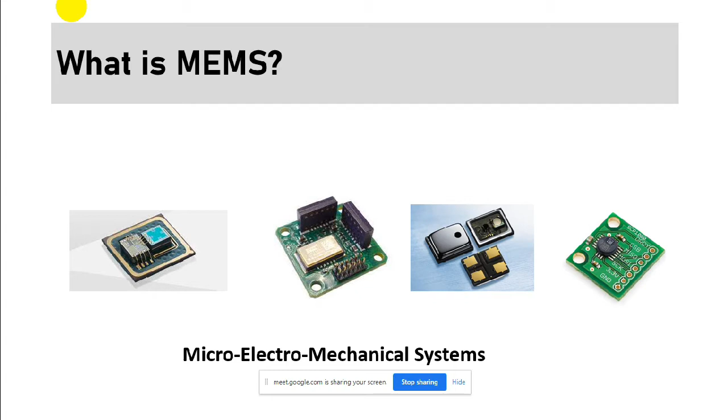Then what is MEMS packaging? We can't use that MEMS device directly because it is exposed to mechanical damages and environmental conditions such as high temperature, so it can't survive. In order to protect that MEMS device, we have to protect it in form of some casing. This casing is known as package, and the packaging of this is also referred as MEMS packaging.

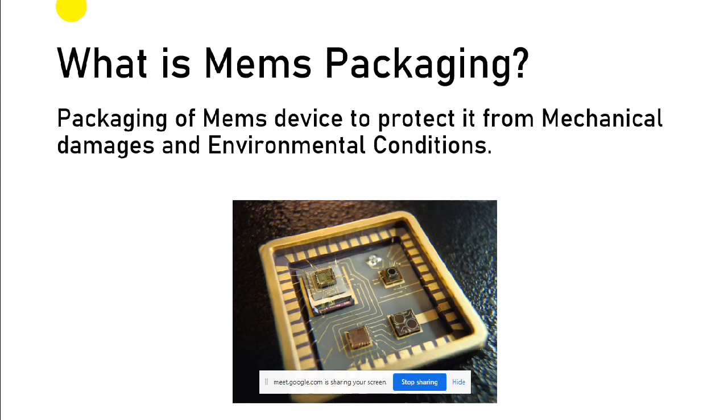So this is the packaging process. First we have very big wafers, and we inspect whether the wafer is working fine or not. Then we saw it, then we separate a dice from it, and this is the dice on which our MEMS device will be based. Then we post process it and do all the necessary connections.

Then a package has two parts. First is substrate and second is a metal cap. So this is cap and this is substrate. The substrate works as the external circuitry — this is our MEMS device, so it should be connected in such order that we can access it from these IO pins.

So there are two methods: first is wire bonding and second is flip chip. In wire bonding, we use fine metal wires, and these wires are connected through these IO pins. This is a very space-taking process. So instead of using wire bonding in places where we require miniaturization and want to consume less space, we use flip chip. I have explained flip chip in further slides, so let's move to the next step.

Then what we have to do, we'll seal this MEMS because it is exposed from the top, so we'll put a lid on it and do the necessary sealing or welding as required. And then we'll do calibration and a final test to check whether all the connections are proper and whether our MEMS device accesses properly or not. There are several types of these package materials.

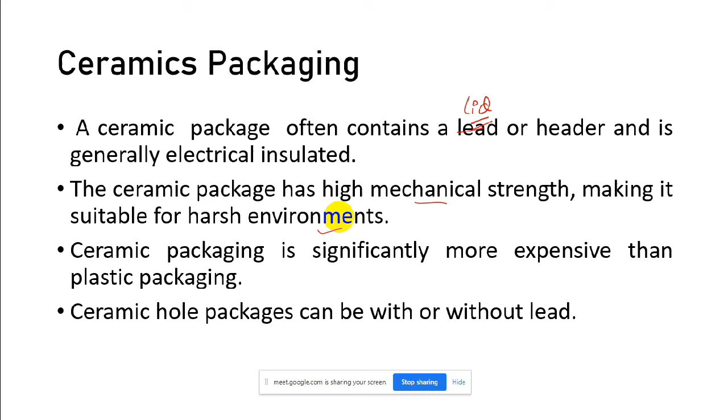We use ceramic packaging because of its high mechanical strength, making it suitable for harsh environments — it can handle stress and similar conditions. Since it's a reliable packaging, it is more expensive than plastic packaging, but it is less expensive than metal packaging.

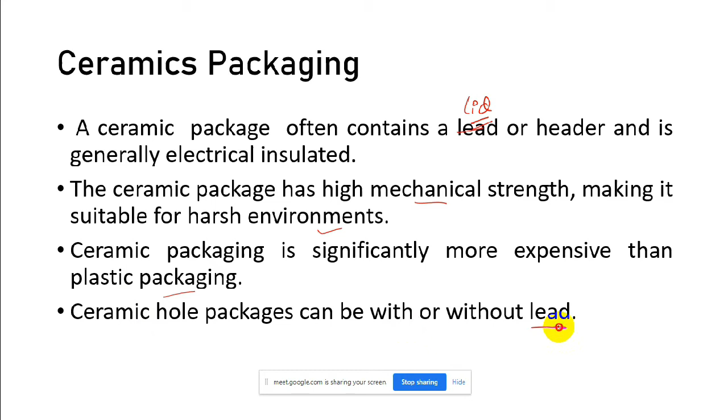These ceramic packages can be with or without lead. I'll show you what lead and lid are. Suppose this is our demonstration of ceramic packaging — this is our ceramic substrate.

We put a MEMS device here, and then we have to connect it from IO pins. You can use these leads for IO, or you can use these metal fillings to connect through our MEMS device. What we do here is a process called wire bonding, which I told you about. This method is known as wire bonding.

After connecting it, we place a lid on it so that it could be protected from environmental conditions and mechanical damages. So this is the final output of how this looks, and this is how it looks.

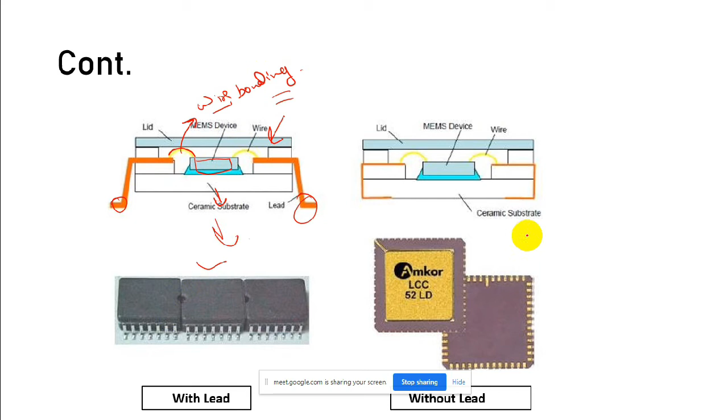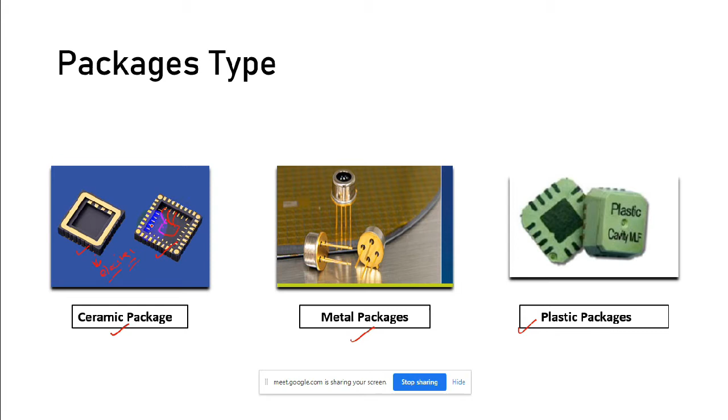Let me clear one thing. I told you that when we are not using leads, we can use these types. So here our MEMS device will be based, and with the help of wire bonding, we can connect like this, and then we can access that MEMS device later.

Next is our metal packages. Metal packages are attractive because wherever we want hermetic or airtight sealing, suppose this is our microphone sensor or gyroscope sensor, these sensors require vacuum conditions. So first we'll create a vacuum condition. Suppose this is our substrate, we'll put our MEMS device here, create a vacuum condition, and then put our lid here after doing all that wire bonding or flip chip method. Then from these IO pins we access this material, this MEMS device.

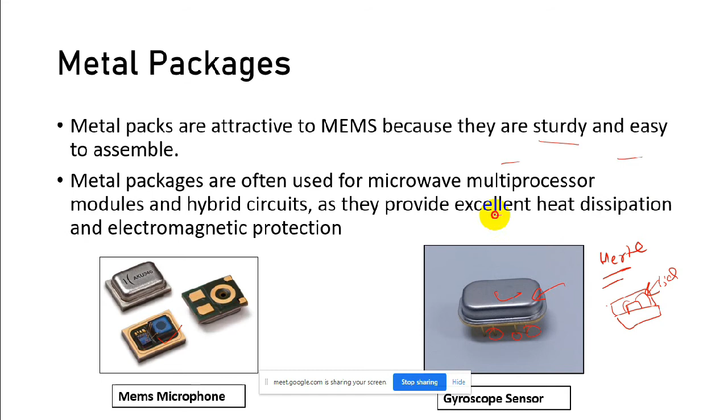These are often used because they are sturdy, as I told you, and easy to assemble. These are also expensive, one of the most expensive processes compared to ceramic. It also offers excellent heat dissipation and electromagnetic protection. So that's the main use of metal packages.

Then plastic packaging. I told you that it's not much in use, but it has some advantages, and development is also progressing so that we can make this successful. So what are some advantages? These are less expensive than metal, and also lighter than metal. But unfortunately the problem with plastic packaging is that they absorb moisture, and hence it contributes to lower reliability.

Suppose we have a humidity sensor; if we use plastic packaging, that plastic package will also absorb moisture, and hence it will give inaccurate information that needs to be sensed. I told you we have to use a cap, but sometimes when we are using a pressure sensor, we can't use a cap because our sensor will work abnormally if we put a cap on it. So what we do is use a silicone gel.

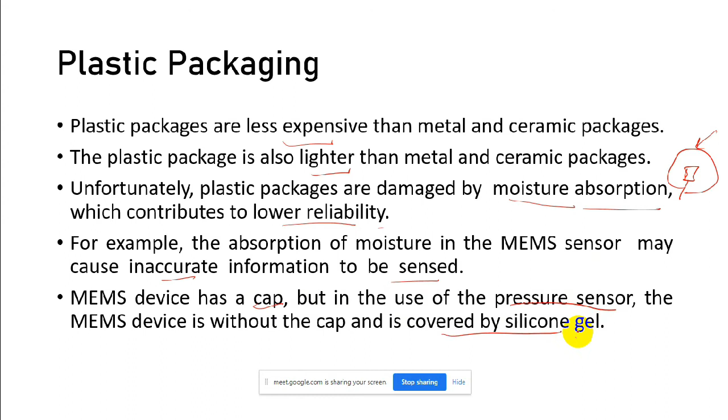Let me demonstrate it. So this is a figure of how it works. We use a mold compound in order to package our device. Here is our MEMS device. We use a cap here, and then we'll do all that wire bonding or flip chip, whatever process we are using for die connect.

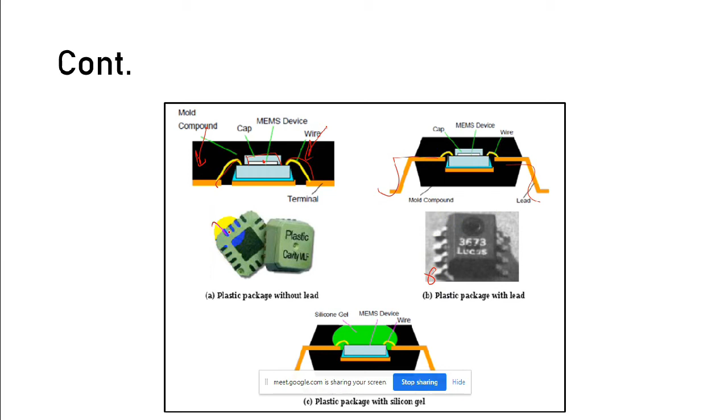Then we use a plastic compound. Here also we can use either these leads for IO pins, or we can use these metal fillings, so that whenever you want to access the MEMS inside this plastic package, you just connect from these metal fillings or these IO pins. And I told you that if your MEMS device consists of a pressure sensor, you have to put this gel so that it can be protected from environmental conditions.

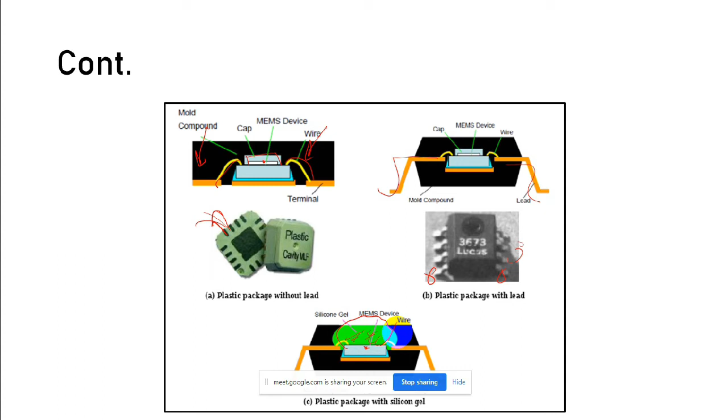Now I told you what the process is. I told you that this MEMS will connect these wires and all. So this process is known as chip to package attachment.

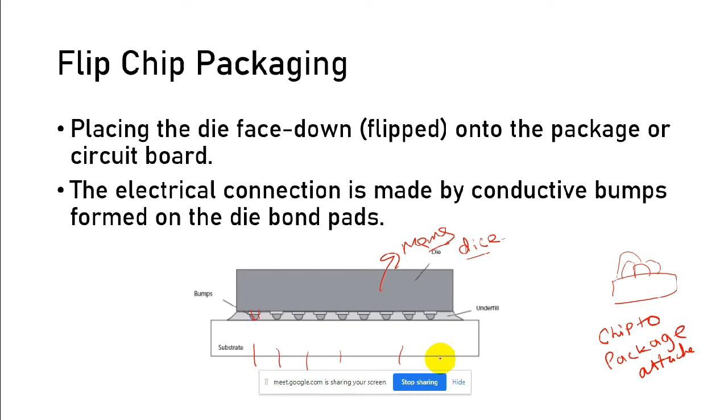So what we do in flip chip packaging is, instead of using those wires, we'll flip this—this is our MEMS device, or MEMS die. We'll flip it so that it creates a connection with the IO pins here, and there are ICs placed on this die, so it creates a very good bonding, and hence we don't have to use external wires.

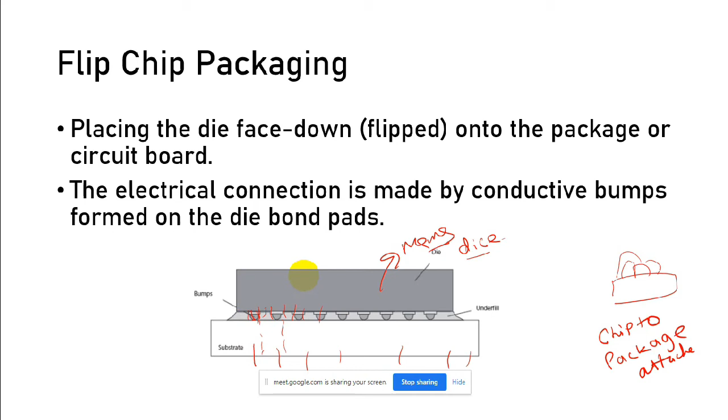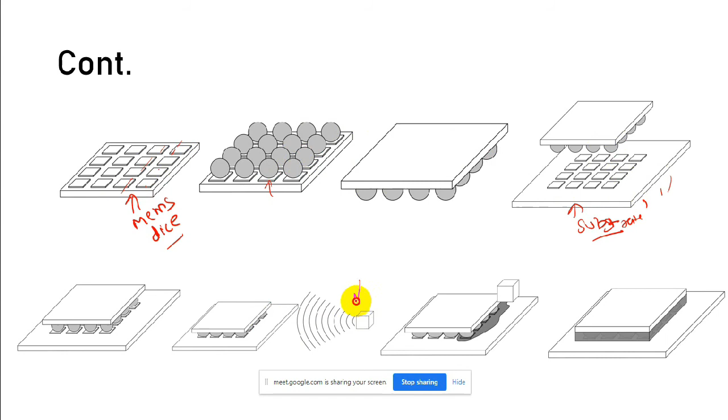Let me demonstrate it more clearly. Suppose this is our MEMS die, on which our MEMS device will be based. These are IC packages, and the working will be somewhat like this: we'll put solder balls on it, these pads are metallized. Then we'll flip this and place it—this is our substrate, as I told you about before—so this is our substrate and IO pins are there. When we place this, we use heat; this is heat reflow.

With the help of heat reflow, we'll melt these balls down, and with the help of electrically insulated adhesive, we'll mount this chip. This will create a connection between this MEMS die, which is our device, and this substrate where the IO pins are located.

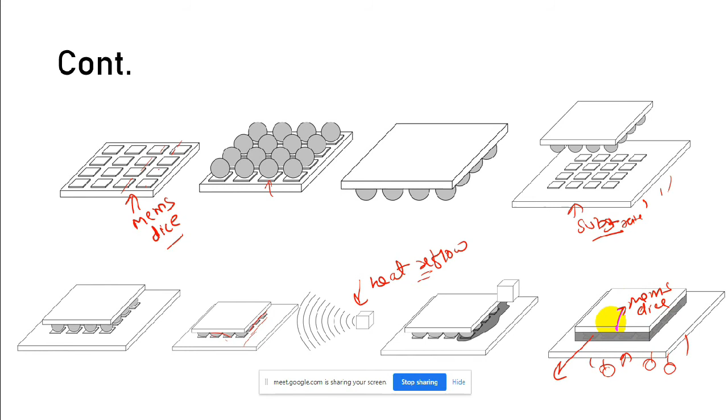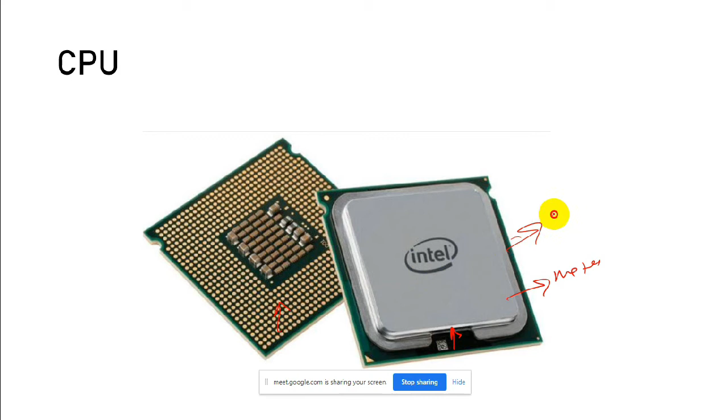CPU is our most common example where flip chip is used. This is our metal cap, these are the IO pins, and a flip chip is placed on this so that it gives better performance. You can see this takes so little space, so miniaturization can happen in such cases.

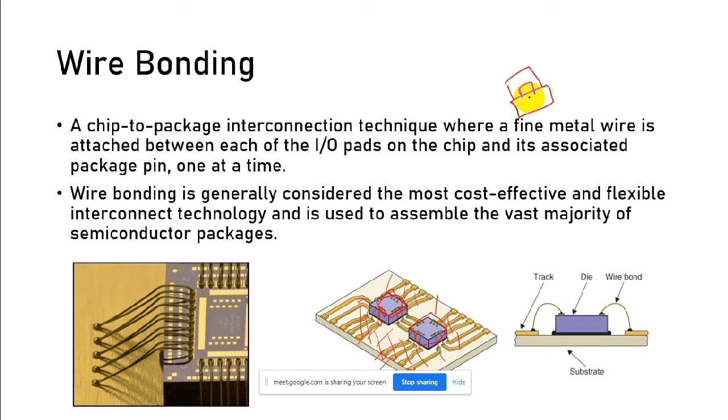I told you that this is our substrate, this is our MEMS device, and we put a metal lid on it, or what we call a welding wheel. I have a short one minute video so you'll understand how all of this works. Suppose this is our metallic substrate, and here the MEMS device will be based.

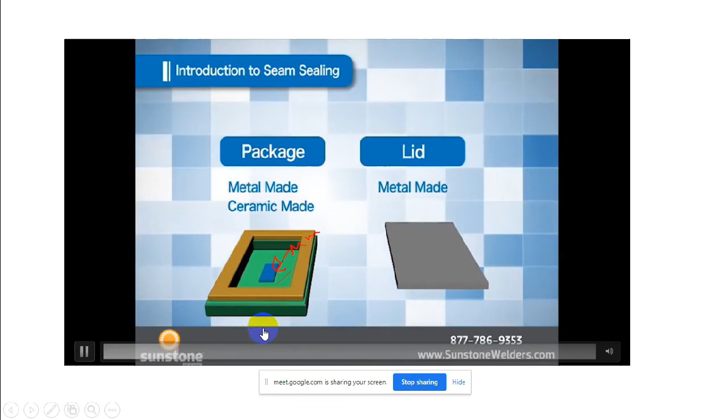One term we often use is hermetic sealing. Gyroscope sensors and similar sensors require vacuum conditions, so when creating that vacuum condition and then welding, soldering, or sealing it, that process is known as hermetic sealing. This is our MEMS device, this is the substrate, and this is a metal lid. This could be ceramic, but the lid should be metal only. We do this so that our device can be stable over a long period of time, which is also known as hermetic sealing.

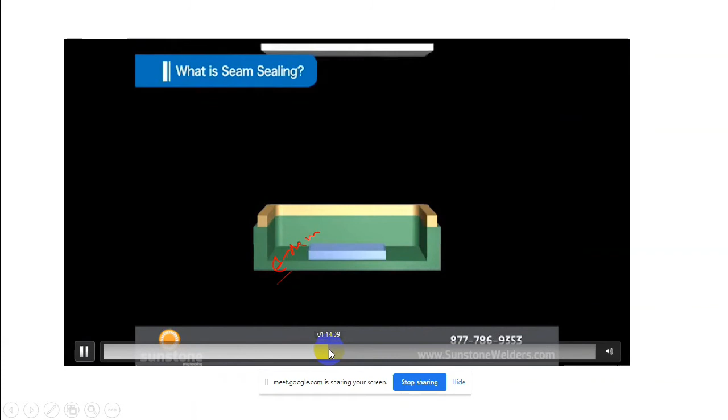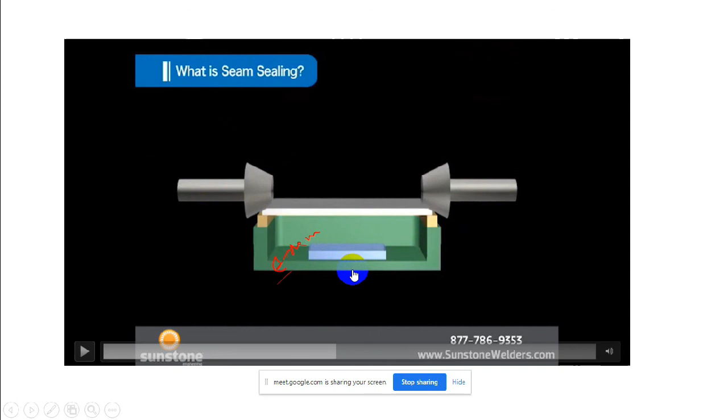How can we achieve such things? By seam sealing we can achieve this. This is our MEMS device, this is our substrate, and this is our metal lid. We place two electrodes here and pass electricity through them, which generates heat at these two points and melts down the metal, resulting in the seal.

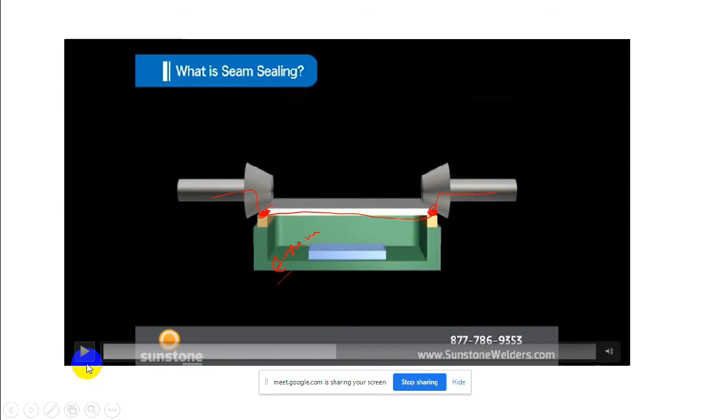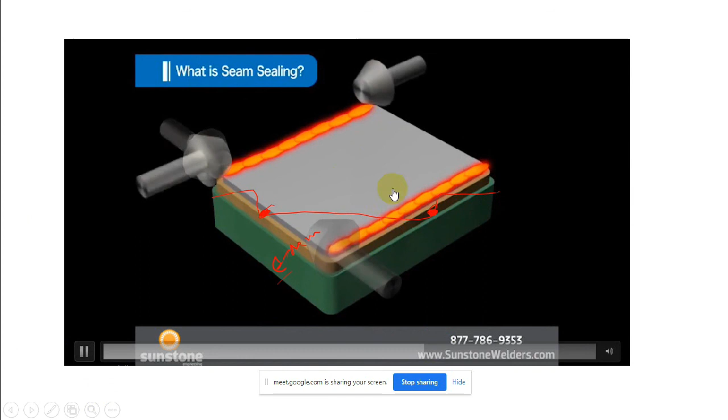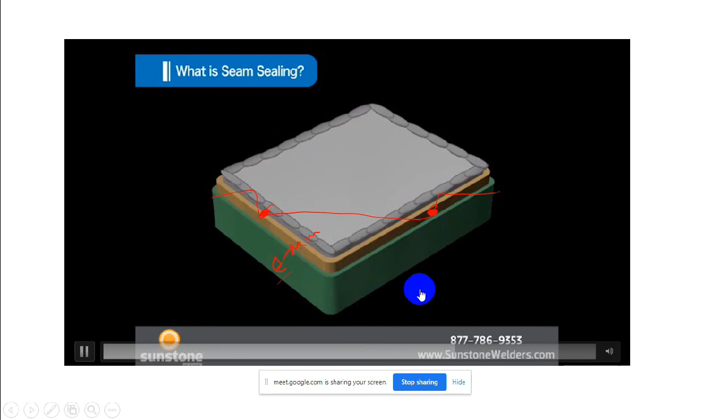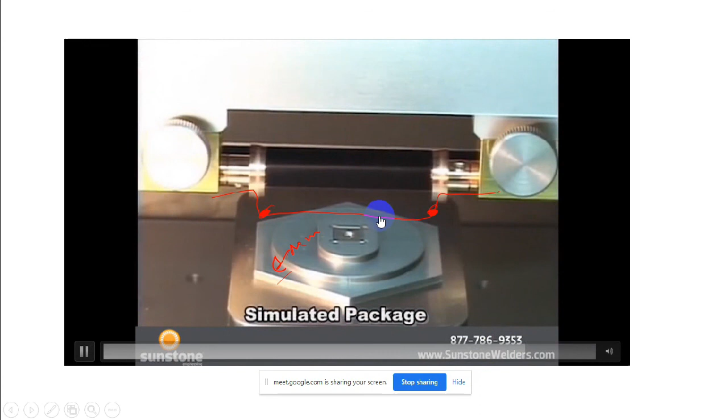You can see here a proper demonstration of how it's done. A seam will be formed, and we will continuously pass electricity through these electrodes until it becomes perfect, and the final product will look like this. This is our package, and this is our final protection for the MEMS device from harsh conditions, environmental damage, or mechanical damage.

So that is all about MEMS packaging. Thank you, sir.

Yes, Ashish, you have covered very well. I think your content is very much important compared to all the colleagues who have presented, because I have not taught this topic in your class. The student responds that all other students covered content already taught by the instructor, but this topic was newer, and mentions preparing for two days, reading journals and an IEEE research paper. The instructor praises the hard work, saying the content is very interesting and efficient, and calls it the best presentation among all given in the last two days.